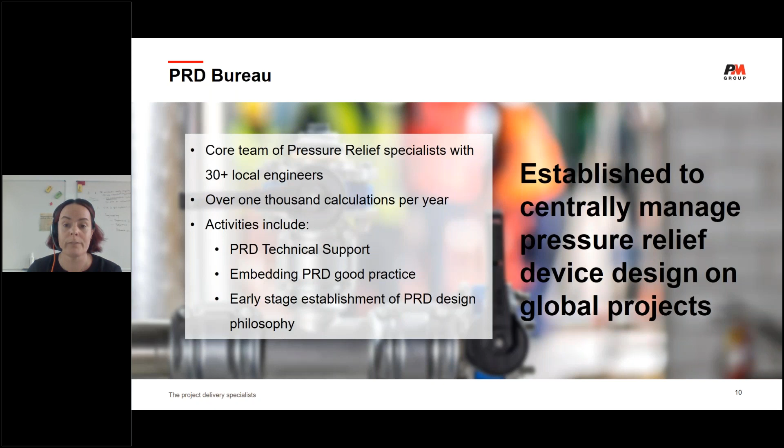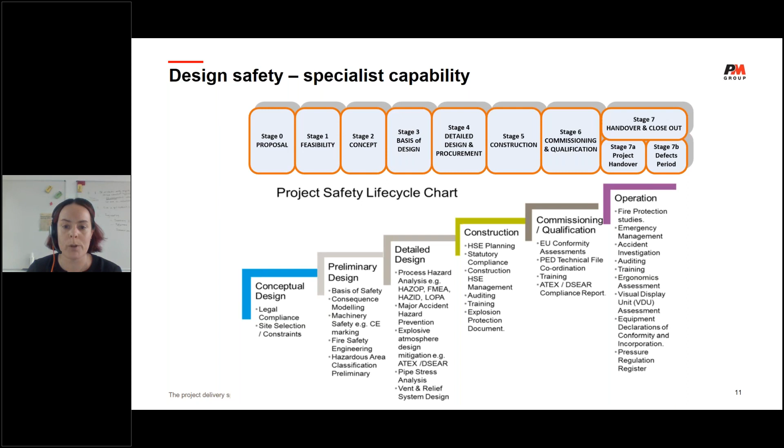Then just before I finish up, just a couple of process safety case studies, really just identifying what we're currently doing as a company. So some of the recent process safety services we would have offered to some of our clients, a big one at the moment, as I was saying, is risk assessment of aging assets, as well as risk assessments around new projects, and doing all the HAZ studies and the LOPAs that are required around that. Gap analysis versus best practice guidance. Again, that's quite a big thing that we would be doing for our clients.

And also the constant updating to your basis of safety and your COMAH as and when processes change or you introduce new processes, and the cycles that you need to do for those report updates in terms of your cyclical HAZOP studies that need to be done usually on a 5-yearly basis if you're an upper tier site.

And some of the clients that we've been doing that work for of late, you can see across the sectors that we work within, so a number of pharmaceutical clients, MSD, GSK, Pfizer, which I'm sure is a well-known name, and AstraZeneca there in current times, but we also do a lot of work with clients the likes of Johnson Matthey, a lot of fine chemicals and refinery work with them.

And that really concludes my presentation. Short, sweet, and hopefully gives you a feel for PM Group. Safety is very much the center of what we do as a company.

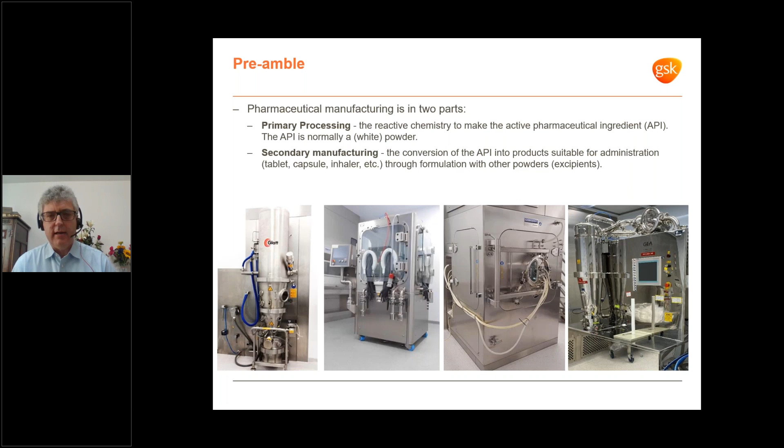And after that, for the last decade, my world has been secondary manufacture that takes that active ingredient, formulates it with other materials to produce the tablets or whatever it is we take as patients. A few operations are inerted, but most of the operations are done in air. And unless you realize the operations are done in air, the rest of this talk doesn't really make sense. And it's these unique challenges that we came to address.

And we set out to solve two real problems. The first is, what process safety information do we absolutely need to know, and what controls do we have to have in place in this early phase pilot plant world?

And to put early phase in context, there might be at most 10 kilograms of material in existence, and we really need that. It's just going to patients for the first time, so we're really short on material. And what happens if we don't know the information that we really need to know? That's the two parts of this.

Now, when I was first out of university and I wanted to know the property of something, I'd go to Perry. If Perry let me down, I'd potter down to the technical library, and nowadays things are much better. Information is just a few clicks away most of the time. But early phase medicine manufacture is different because it's very poor in data.

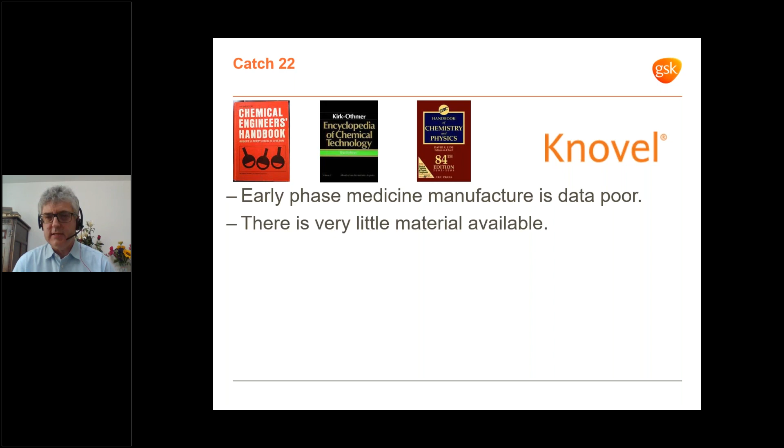It's very poor in data because we're dealing with materials that have never existed before, and there's not much of it available. I said 10 kilograms if we're lucky, which means we often don't have the kilo or so that we need to spare to get full fire and explosion data, because we really need that material for patients, and there's so little of it. And we compensate for this with really quite burdensome layers of protection in our pilot plants to allow for this lack of knowledge, and it makes operating very difficult.

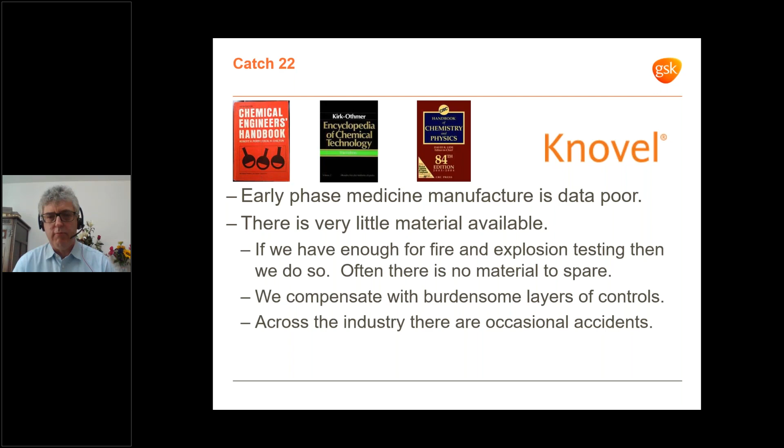And across the industry, there are accidents, and that prompted us onto this work. So there are really two arms to this work to try and make us safer. And the first arm is to really understand, what do we need to know? What can go wrong? What properties must we know to mitigate that? What controls do we have to have in place, and do we know they're working?

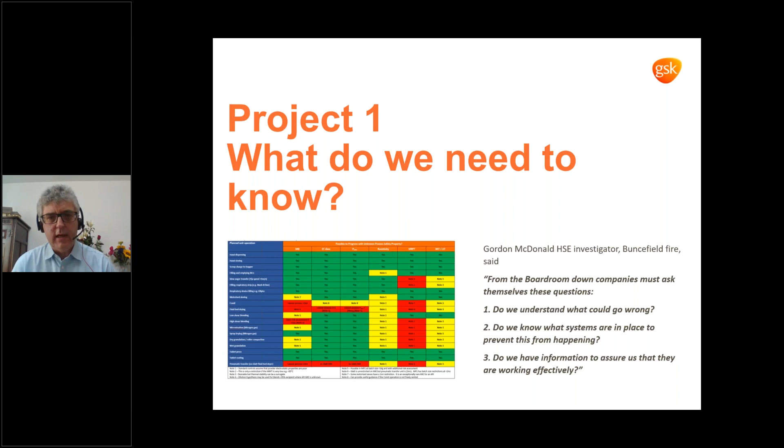So what the team have done is spend a long time laboriously going through unit operation by unit operation, understanding what information is critical and what controls are critical. And that's involved obviously talking with suppliers, literature reviews, a lot of calculations around charge generation potential, some calculation around kinetic energy and angular momentum, and all sorts of other things.

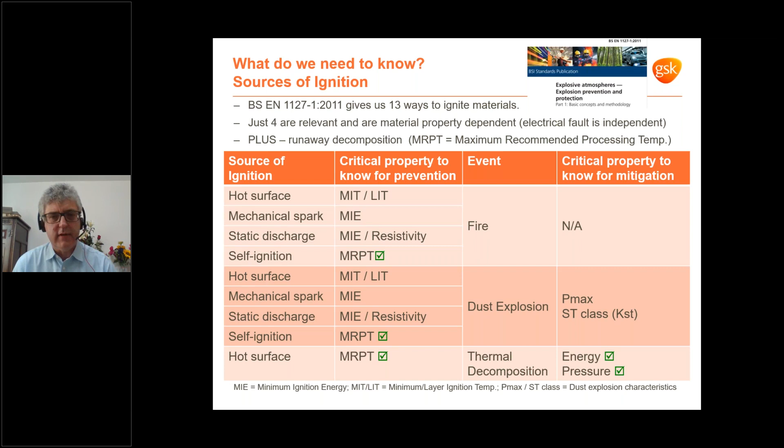So each unit operation ended up with several pages of detailed basis of safety, which at the top level, we have some operations come out very, very benign, and others are completely different. So the milling operation, there are a few things that we absolutely have to know, and there are lots of controls that are completely critical to that safe operation. And in going through this work, we found some controls where we have to actually go beyond the special conditions on the ATEX certificate. In fact, that isn't sufficient, and we need more restriction.

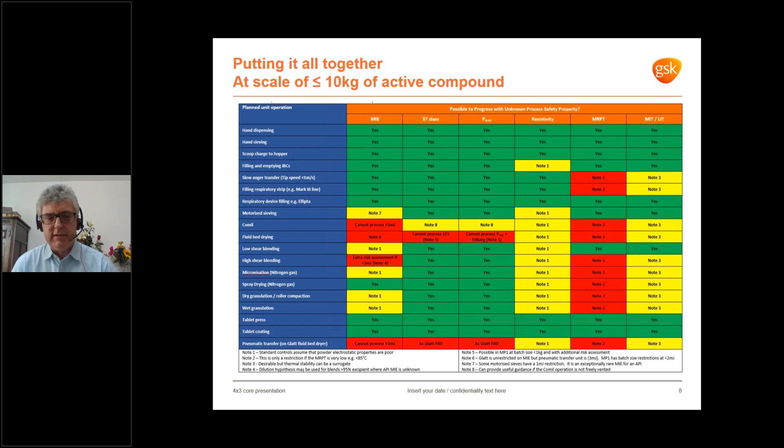All this comes together in a very handy chart that sits in our plant entry risk assessment process. And you can see the sea of green, that often we can cope without knowing information as long as our controls are working. And then you can see various areas in red where we absolutely have to know things, and we cannot operate unless we know it. And inevitably, there are grey areas, in this case masquerading as a yellow area, where things are more nuanced. And this is proving hugely beneficial to us in our plant entry process. It's made a real step change for us.

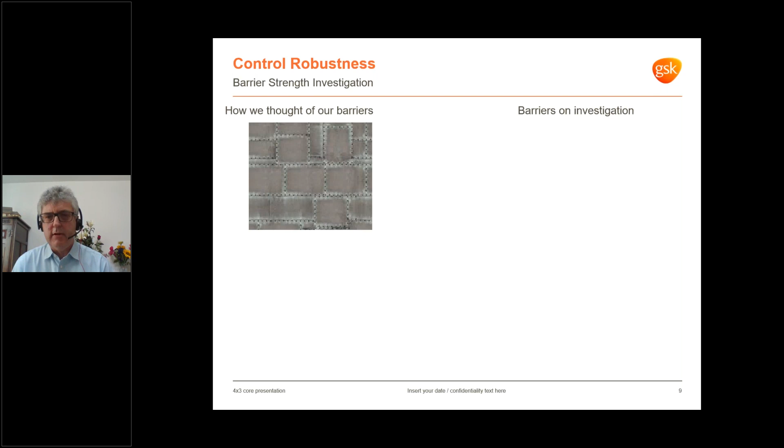But this only works if our controls work. So we had to look at our controls, and I thought our barriers were really good. Go out and investigate them, and that wasn't always the case. And I really want to thank the plant team for the work they've done, for the integrity, determination, and excellence they've shown in going out, identifying weak barriers, and fixing them.

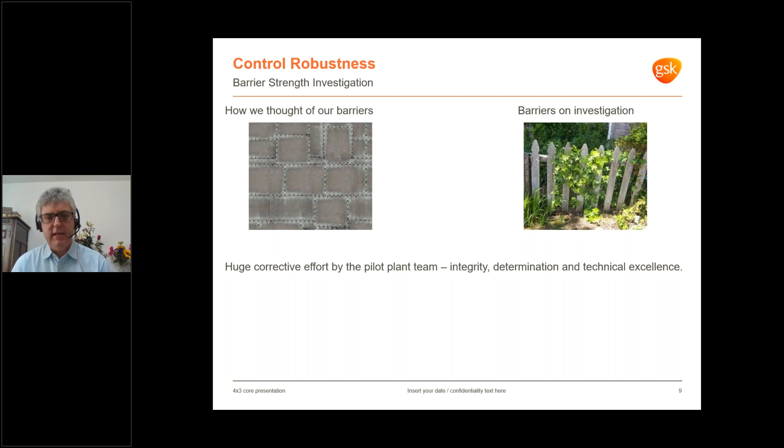There's lots of chunks of work that sit under this. I particularly want to call out our new FERA process, which is a step change improvement on everything that went before, and it's coming in very early at design. We're building in robust barriers from the start, and we're marrying process and operational safety together.

They aren't always comfortable bedfellows. Now, though it isn't on this slide, I'd also like to call out Sydney Lang's work on pre-start earthing checks and making that a really resilient system, because in the absence of inerting, earthing is a really key layer of protection for us.

So that was a brief overview of understanding what we need to know. Then the second problem is, what do we do if we don't know it? So what do we do if we have to know dust explosion properties, or we have to know minimum ignition energy, and we don't know them, and we can't spare the material to go out and find them? If we can spare the material, then we do.

And what I'm going to discuss briefly now is recently published, and please by all means go away and look it up. I think it's very technically interesting, but it's not about being technically interesting, it's about keeping people safe.

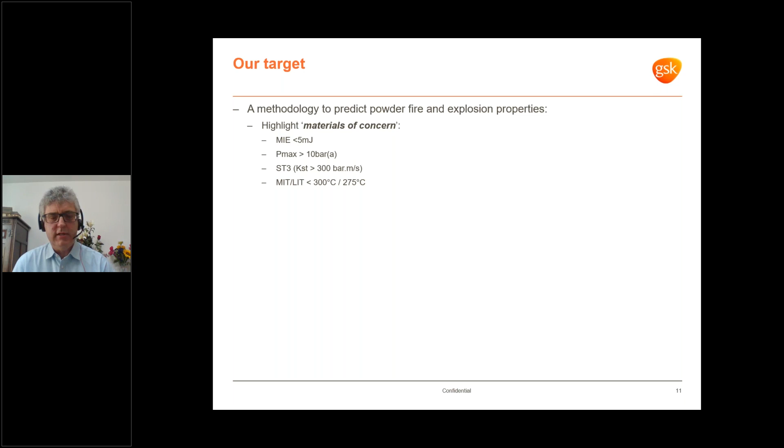So our target is to have a methodology to predict fire and explosion properties and identify materials of concern. And for us, a material of concern is one which is unusually susceptible to ignition, has dust explosion properties beyond those that we can normally mitigate in our equipment, is unusually susceptible to ignition at a low temperature, and many people on this call will instantly recognize that as T3.

And our success criteria, well, we should use less than a gram of material. Even though we're a large pharmaceutical company, we couldn't spend any money. And we'd accept a level of false positives. What we really wouldn't want is any false negatives.

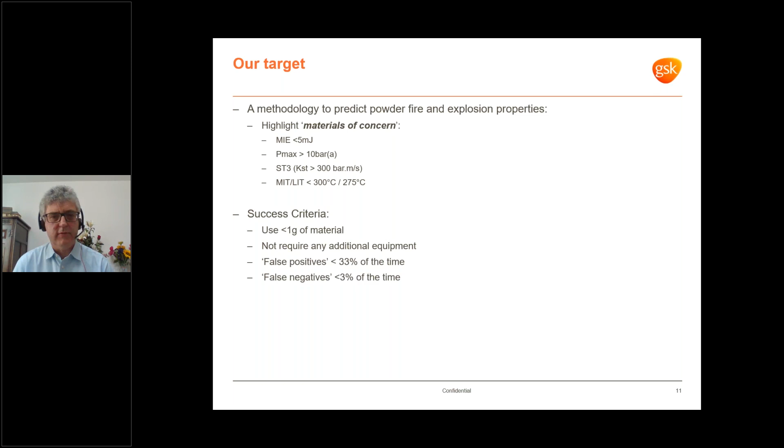So moving on to minimum ignition energy, there's an existing literature equation to give minimum ignition energy, and for a range of typical densities and specific heats of products, we can solve this equation. Since the equation was developed, there's been greater understanding of spark generation efficiency. There's a correction that needs to be added for that, but it comes out at about 9 to 26 millijoules.

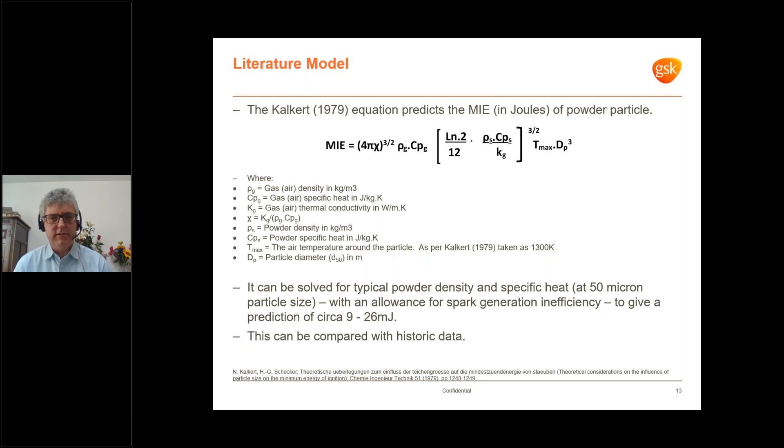And for our established products over time, we've burnt a lot of material to understand their fire and explosion properties. So we've got a big database and a fantastic custodian of that database. So we can compare that prediction with historic data. And what we see is the equation is in the right ballpark, but it isn't giving a broad enough range.

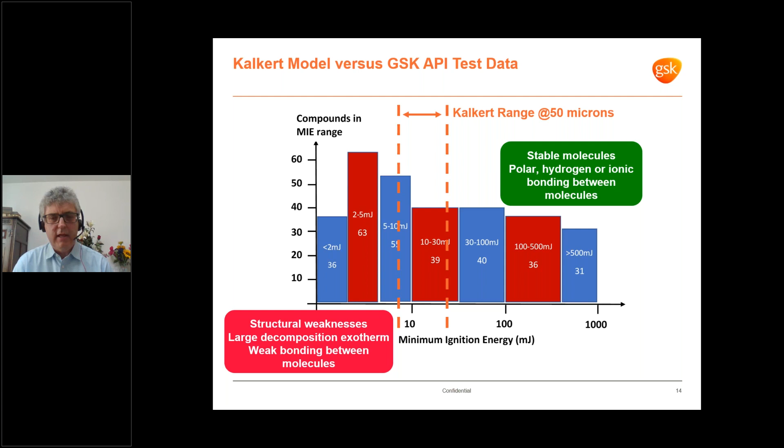And to run the model, you need good chemists. Fortunately, we have some excellent chemists, because we need people that can understand how molecules will cleave and what they'll cleave. And we need to back that up with 2 experiments. But those 2 experiments only use 50 milligrams of material. For the future, we think there's another factor around shape, flow, dispersion, but that factor is probably more important for the dust explosion model we're coming on to.

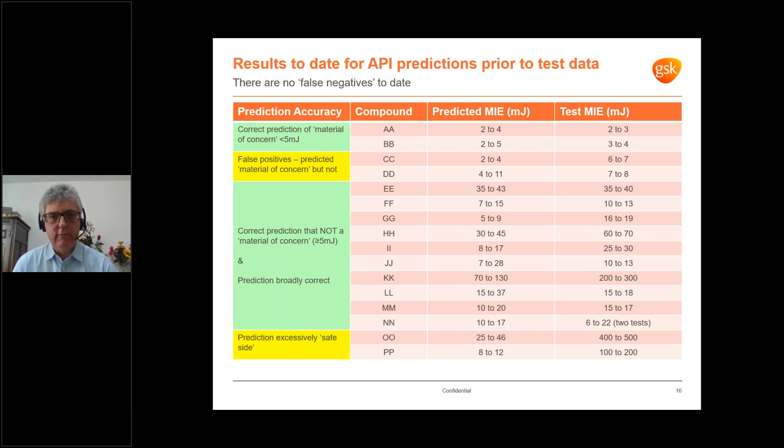But MIE is going really, really well. Dust explosions follow the same hypothesis, that the dust explosion properties are dominated by the most readily flammable portion of the molecule. So sometimes that is the whole molecule goes up, but more often we believe that's a flammable fragment that's cleaving from the parent, and it's that fragment, sometimes a couple of fragments, that dominate the dust explosion properties.

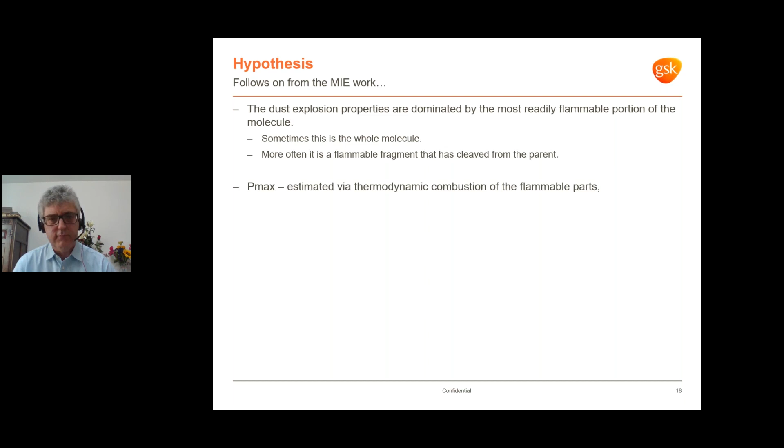We do Pmax by thermodynamic combustion of the flammable parts, and essentially that's undergraduate thermodynamics, which is just as well because it's the only thermodynamics I'm still able to do. And it's based on the cleaved flammable fragments of the molecule. We do the whole molecule as a safeguard, and heat of combustion comes from a bit of simulation software called CHETAH that John also mentions in his talk that's up next, or published data if it's cleaving a really common molecule. KST, I'll come on to the next slide.

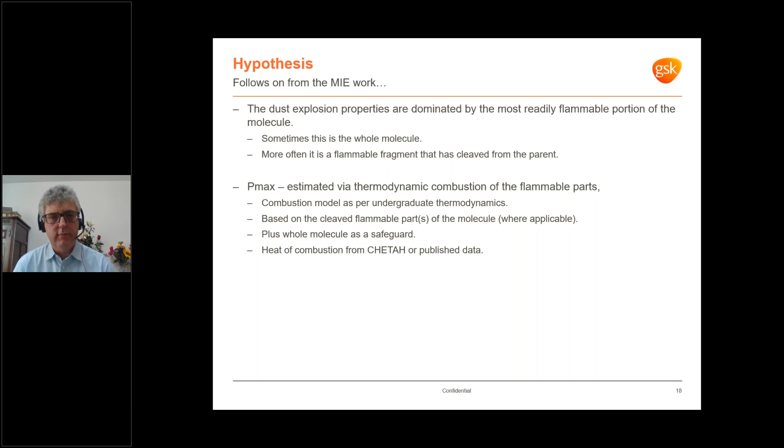And we think we have these excessive safe side results because the model assumes perfect dispersion of the powder, and we've got some evidence that these powders don't actually disperse perfectly. Whether we can build this into the model or not, we don't know. We're still working on that.

The minimum and layer ignition temperature follows really the same methodology. It ends up as a flow chart. So we're interested in how the molecule cleaves. Does it cleave something which has a very low auto ignition temperature? Is there anything in the structure that suggests it could act as an accelerant? Does it have a very large heat of thermal decomposition that can help take the molecule up to an ignition temperature? If not, we go down a very clean side of the chart. We end up at T3, we might end up at T4, or we might end up at we really have to do the experiment and there's no way out of doing the experiment.

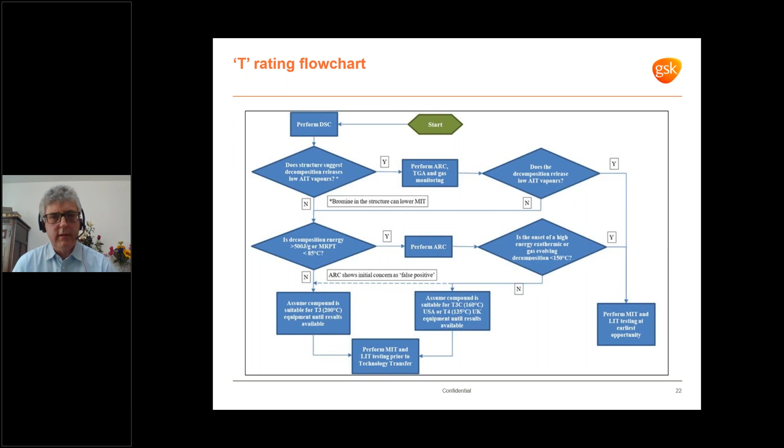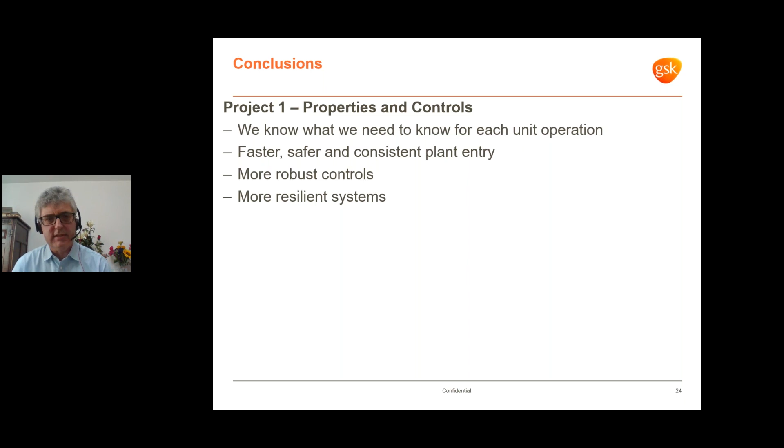In conclusion, the first project, how do we know what we need to know? That's gone really well. So we do know what we need to know for each unit operation. It's giving us much quicker and safer and consistent plant entry. We've got better controls and more resilient systems. For property prediction, we should always test if we have the materials to allow us to test. Prediction is not as good as testing. We should always test, but we are picking up the materials of concern with the caveat that it's a relatively small sample size. We're meeting our success criteria.

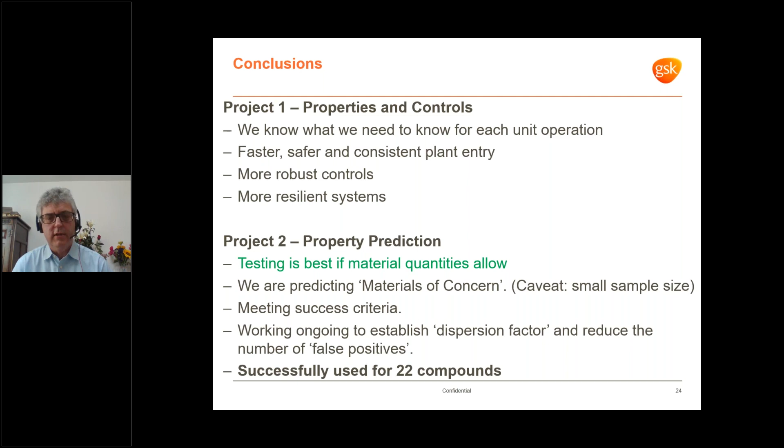We can work on the dispersion factor. Whether we achieve that or not, I don't know. We shall see. But it's in use. It said here we use it for 22 compounds. I think we're now up to 24 compounds, but it's in use and really providing value for us.

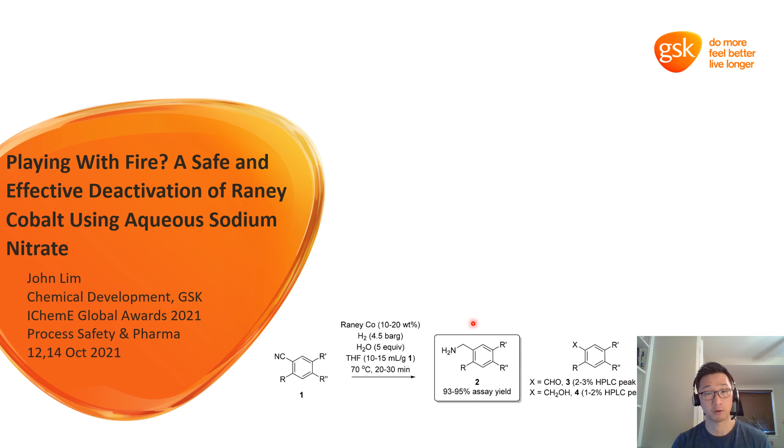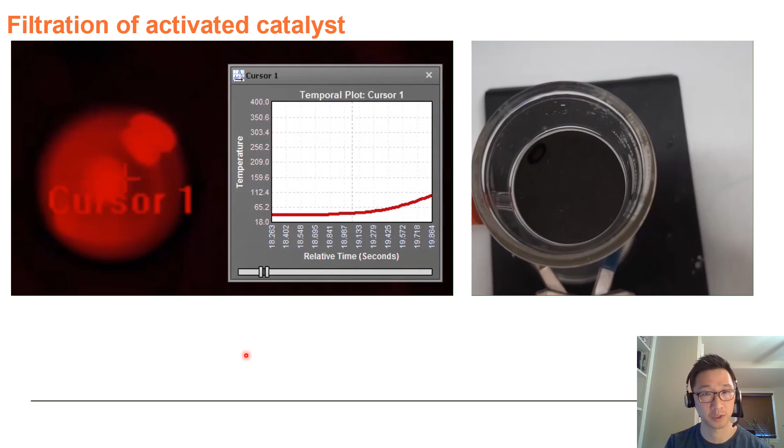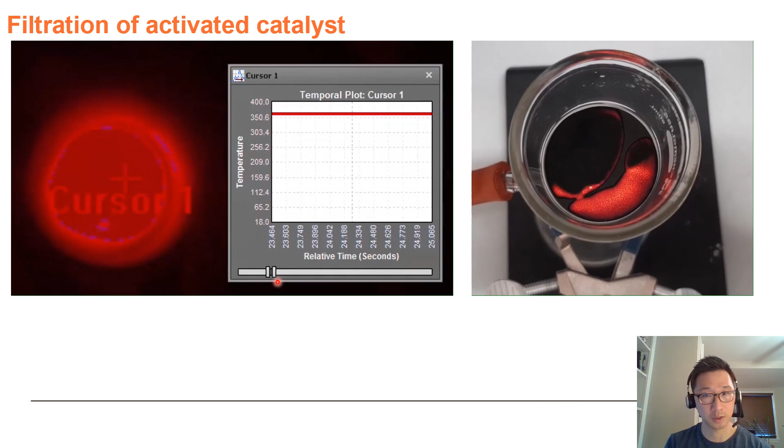So this is what happens when Raney cobalt gets dry. What I'm doing here is something you should never do: filtering the catalyst to dryness. The image on the left is taken with a thermal imaging camera, the image on the right with a standard video camera. As you can see, upon reaching dryness, the catalyst bed reaches temperatures in excess of 350 degrees, which is the detection limit of the camera, so the actual temperature is probably much greater than that.

So the pros of using Raney cobalt is that it gives us a very clean reaction profile using an earth-abundant metal. The cons is that because we're loading 10 to 20 weight percent catalyst, that's a lot of catalyst that we have to handle and dispose of later.

Now we had a pilot plant campaign planned at our Cork pilot plant where we anticipated making about 100 kilograms of API. If we're charging 10 to 20 weight percent catalyst, that's 20 kilograms of catalyst or so. You don't want that much catalyst reaching temperatures in excess of 350 degrees in just a few seconds. Thus the Cork pilot plant requested that we come up with a way to effectively deactivate the Raney cobalt so that it was safe to handle even when dry.

So in other words, we couldn't just drum up the stuff underwater, we actually had to deactivate it.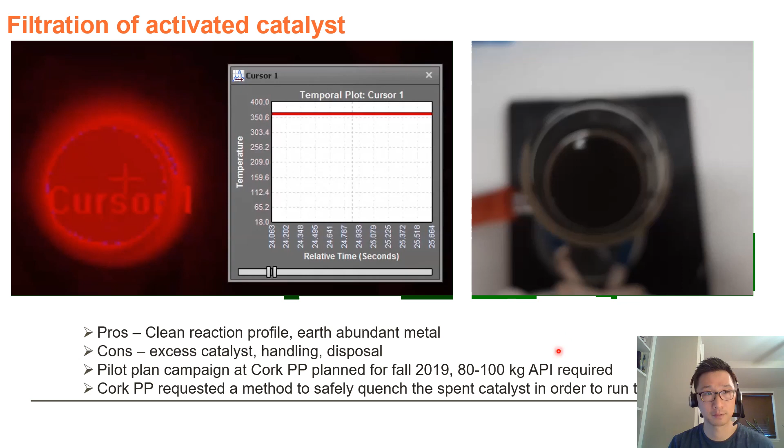Now, a common way to deactivate Raney metals is using bleach. So what I'm doing here in this video is I have a little bit of Raney cobalt in the graduated cylinder, and I'm adding typical household bleach solution. As the video comes into focus, you'll notice some vigorous bubbling happening. This is concerning; you don't want this happening in your reactor. It's not too dangerous here in the fume hood, but you don't want all this off-gassing to happen when you're trying to quench the catalyst in a reactor.

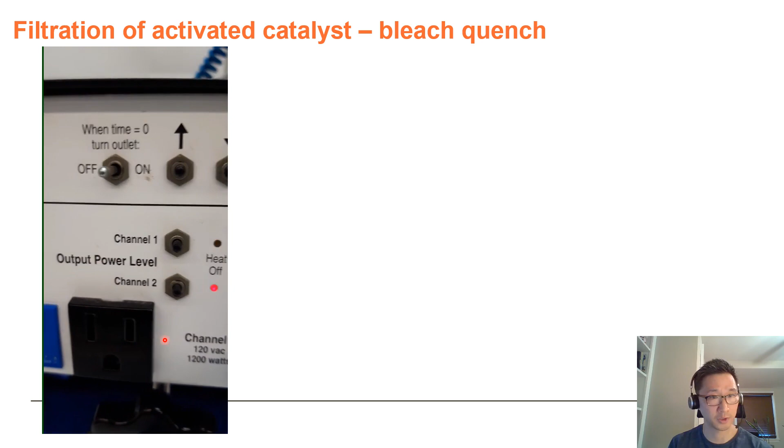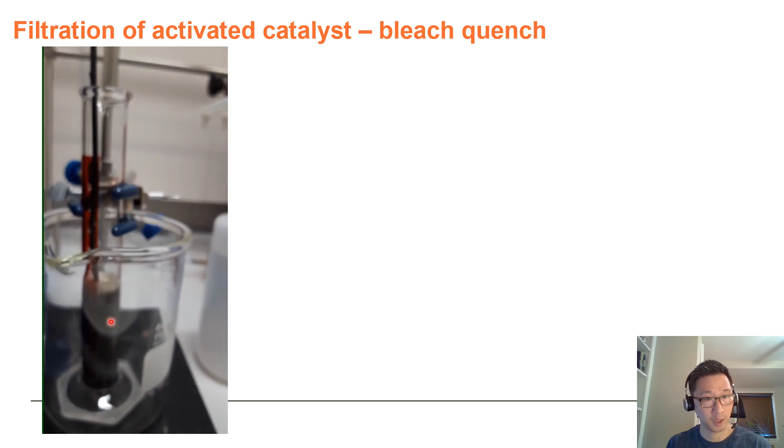What's also very concerning is that the temperature of the slurry was about 20 degrees at the start before the addition of the bleach. Upon adding the bleach, you notice a very rapid exotherm in excess of 20 degrees. Keep in mind, this is not really a controlled reactor—it's open to air, so there's probably some heat loss to the environment, and that 20-degree exotherm is probably not indicative of the actual heat generated. There's probably more heat than that.

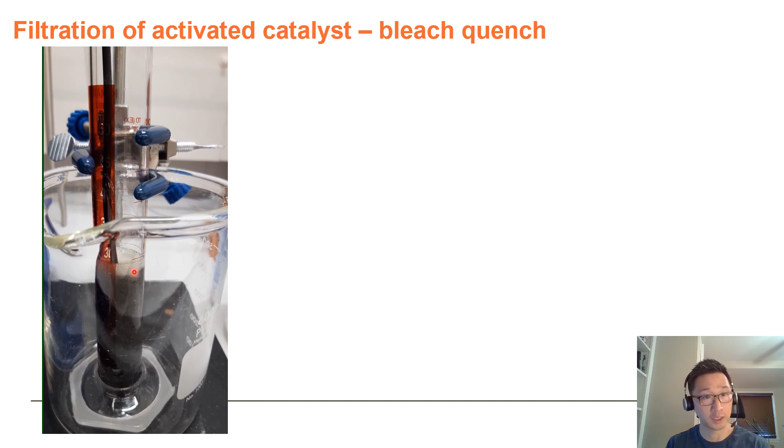Qualitatively, we can see that the bleach quench is not safe. It's exothermic, and we see a lot of gas evolution upon quenching. Now, I should say, though, that the bleach quench does work—the catalyst, after it's been treated with bleach, is deactivated. However, there are some hazards that are clearly evident just upon qualitative observation, but we wanted a more quantitative evaluation of the hazards of using bleach to quench Raney cobalt.

So in order to quantitatively assess the hazards of using bleach to quench Raney cobalt, what we did is we took 35 grams of Raney cobalt from our supplier. We put it into a Parr vessel and hydrogenated it with about 4 or 5 bar of hydrogen to mimic reaction conditions. We then took that activated catalyst and measured the heat and off-gassing when quenching with 20 volumes of 5% bleach in what's called our RC1, or reaction calorimeter.

The green trace represents the addition of the bleach. The red trace represents the heat output. The blue trace represents the off-gassing. What you notice is that once we start adding the bleach, there's an immediate exotherm. In fact, there's so much heat we actually have to wait for the reaction to cool down before we add the rest. Once we resume the bleach addition, we notice another exotherm and very significant off-gassing here, and the gas we later identified as oxygen.

At the end of the reaction, we did the calculations and found that the total heat output was about 3,800 kilojoules per kilogram of catalyst, which equated to a 53-degree adiabatic temperature rise. Now, a typical plant reactor can handle about a 20-degree adiabatic temperature rise, so this is well in excess of that. What was also very concerning is the gas evolution, 91 liters per kilogram of catalyst. So once again, if you're charging 20 kilograms of catalyst, you do not want to be producing about 1,800 liters of oxygen when you're trying to do the quench.

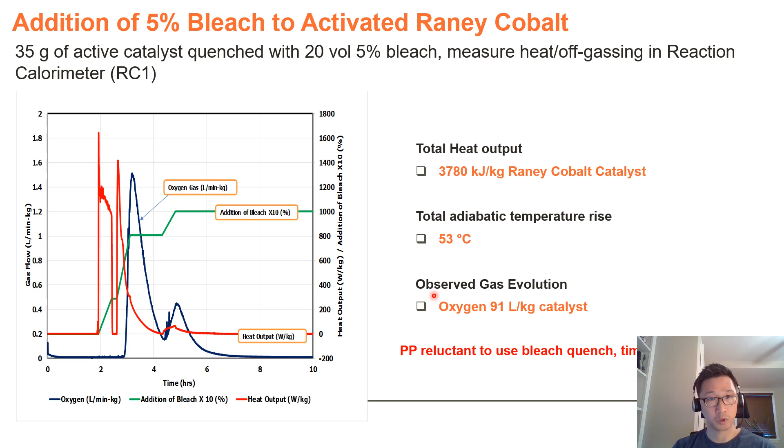Now, the pilot plant staff, upon seeing this data, were understandably alarmed, and thus they would not run the Raney cobalt process as we designed it using the bleach quench. At this point in the project, there were a lot of meetings happening, a lot of brainstorming, a lot of ideas that didn't actually work. And so this put the project timelines in jeopardy.

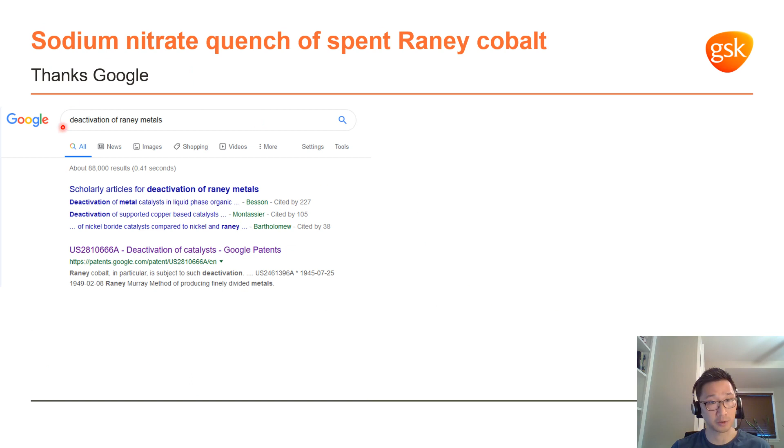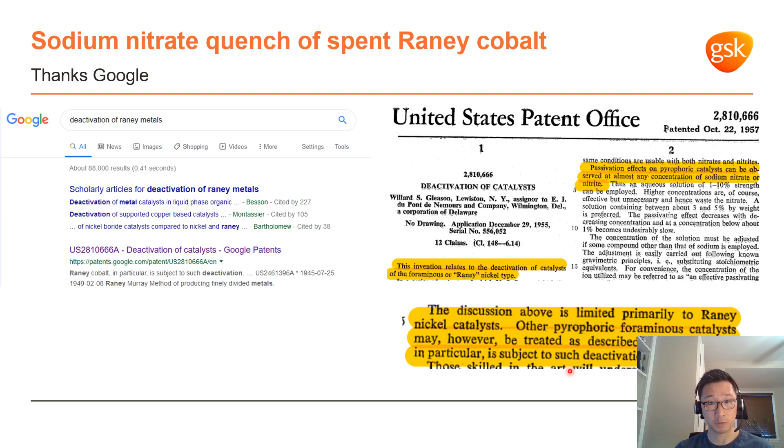So at this point, I did what a lot of people do during times of stress: I went to Google. Here is a screenshot of the Google search I did that day, 'deactivation of Raney metals,' which brought back this patent from 1957 from the DuPont company. The authors describe deactivation of Raney nickel using aqueous sodium nitrate or nitrite, saying the aqueous sodium nitrate was a little bit more effective. It's one of the shortest patents I've ever read, and I'm glad I read to the end, because at the end the authors mention that Raney cobalt could also be deactivated in the same manner. So we decided to try it out for ourselves.

So we did the same reaction as before. We took 35 grams of Raney cobalt. We activated it under 4 or 5 bar of hydrogen, but this time we quenched with 20 volumes of 5% sodium nitrate in an RC1, where we measured the heat and off-gassing.

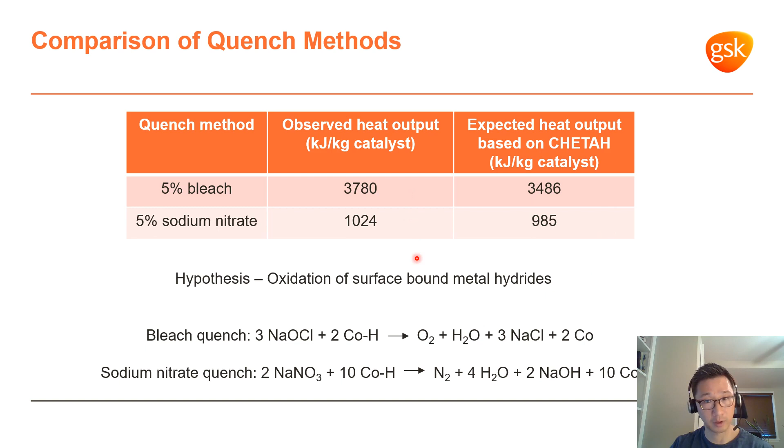This is a hypothesis of ours, so in order to test it, our process safety engineers perform what's called a CHETAH calculation. CHETAH is just a standard process safety calculation where they estimate the heat output based on published data. When we do the calculation based on these proposed balanced chemical equations, the expected heat output for each quench is very close to the observed value.

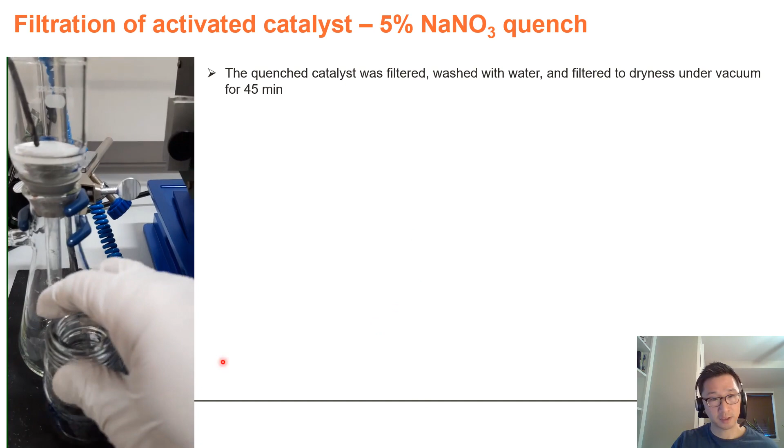The numbers are all well and good, but does the sodium nitrate quench actually work? Does it actually deactivate the catalyst? So what I've done here is I've taken some activated Raney cobalt, slurried it up in some sodium nitrate solution, and I'm going to filter to dryness again.

Now, a lot of presenters will save the exciting video for the end, the one with the big explosion. I'm going to do the exact opposite and show you the most boring video here at the end of the presentation. As I filter to dryness, absolutely nothing happens.

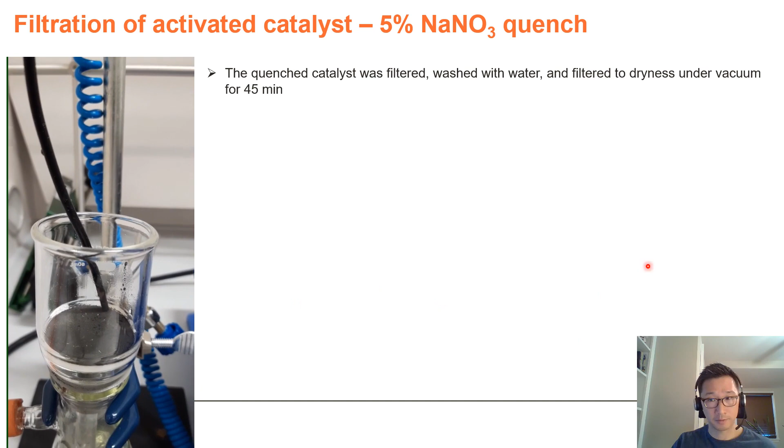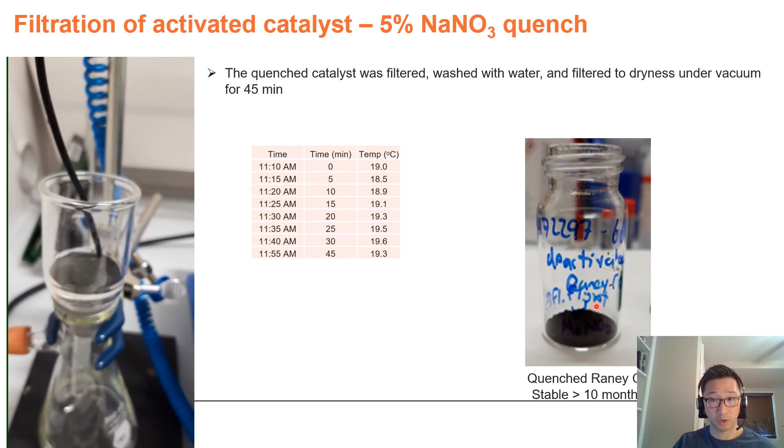So I measured the temperature of the catalyst bed for 45 minutes. I won't make you sit through all 45 minutes, but in all that time, the temperature of the catalyst bed never gets above 20 degrees. The catalyst has been completely deactivated, stable to open air even when dry. This material is sitting in my fume hood as we speak, completely happy. No self-igniting behavior is ever observed.

And thus, upon seeing the data, the Raney cobalt process was approved for our pilot plant campaign. If you care to read about this further, we published an OPRD not too long ago.

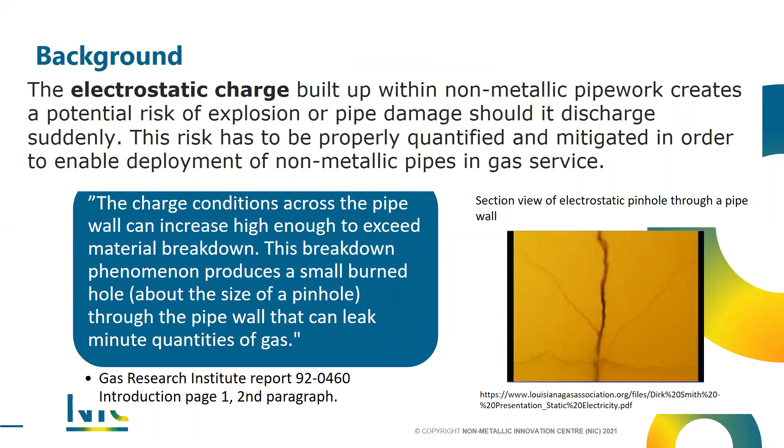So the risk of electrostatic discharge should therefore be properly quantified and mitigated to ensure safe operation of non-metallic pipes in gas service, and this is a challenge that we've addressed in this work. Our aims were to develop a model of a non-metallic system, and this would be a multi-physics modelling approach to assess the risk of electrostatic discharge. The problem is highly nonlinear and multi-physical, and we would validate the model against experiment. So that was a challenge.

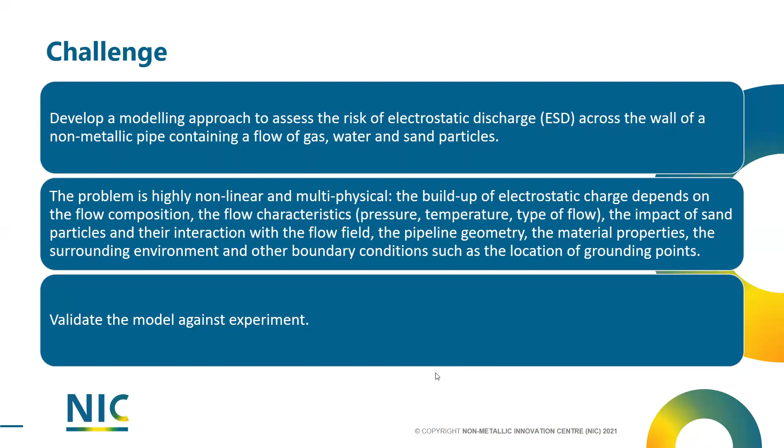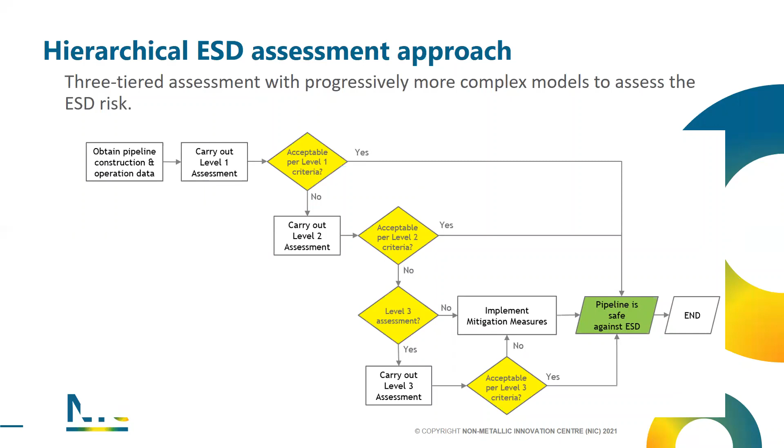So can we predict the risk of electrostatic discharge in non-metallic pipes? We created a hierarchical assessment method, whereby increasingly more detailed and complex models, as you progressed down the levels, gave more accurate results. So going into detail on the different levels.

So our level 1 approach, which was the baseline approach that we adopted, was the most conservative method and relied on determination of the flow regime using Baker or Mandhane charts, which use the gas and liquid velocity as inputs. If a mist flow was present, then it was determined that there would be a high risk of static charge buildup and potential discharge. And so the operating conditions would be altered to avoid this mist flow regime.

This approach has several limitations, however, in that it is reliant wholly on the flow regime, it's overly conservative, and the proposed mitigation measures can be difficult to implement. In addition, it doesn't quantify the risk of ESD.

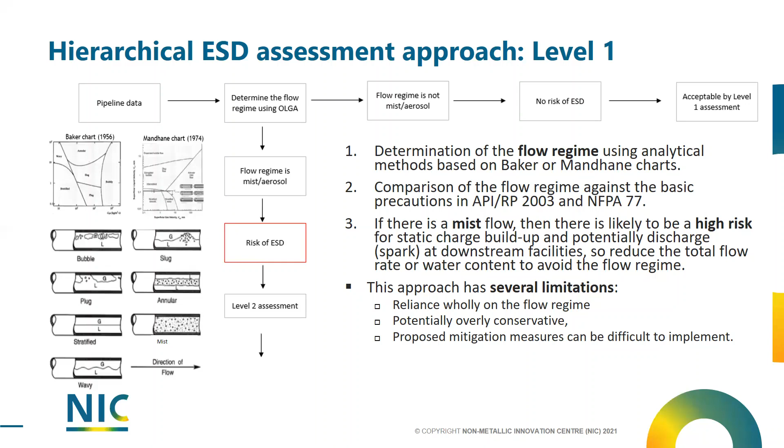So limitations of the level 2 approach are that there are conservative assumptions incorporated in the Walmsley equation, such as the assumption of a constant electric field through the thickness of the pipe.

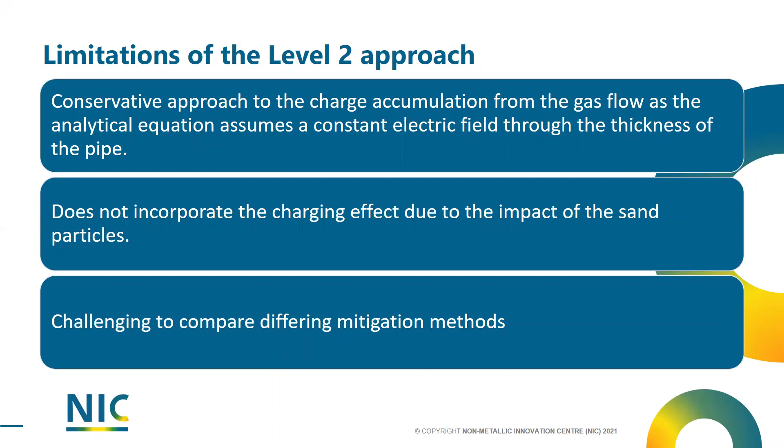In addition, the level 2 approach does not incorporate the charging effect due to the impact of any sand particles present, and it's challenging to compare different mitigation methods. So our level 3 approach

was the full numerical modelling approach accounting for the multi-physical behaviour in COMSOL. The velocity of the gas flowing through the pipe was found using the pipe flow module, and this was then used to calculate the streaming current expected along the pipe. An axisymmetric model in the AC/DC module was then used to calculate the potential on the inner surface of the pipe and the electric field across the pipe wall.

The streaming current was applied as a boundary condition on the inner surface of the pipe, assuming exponential charge generation and charge relaxation, and grounding on the outer pipe surface and the pipe ends due to the buried nature of the pipes that we were modelling. The top image shows a close-up of the results of the plot of the potential from the AC/DC module. It's a close-up at the end of the pipe, and you can just about distinguish between the fluid and the pipe wall at the bottom of the top image.

We then compared the results of the AC/DC module to the analytical Walmsley equation. We found that applying the streaming current using the external current density boundary condition, a specific boundary condition in the AC/DC module, whereby the electric field across the pipe wall was constant, provided results which coincided with the Walmsley equation, shown by the light blue and yellow lines in the graph.

Applying the streaming current using the boundary current condition, which is more representative of the physical situation, allowed for a radially varying electric field that reduced the conservatism further and provided a more accurate value of the potential on the inner surface of the pipe.

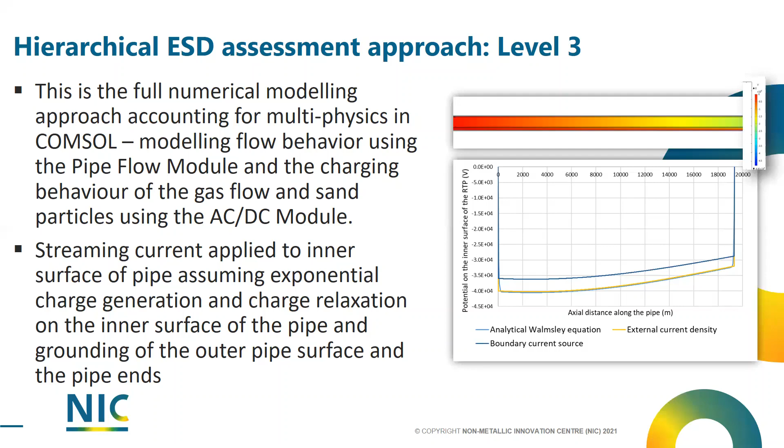We then built upon the level 3 model to add in the behaviour of sand. We did this using the capacitor model, which was used to model the charge transferred during the impact by treating the sand and pipe as either side of a capacitor. There are several tuning parameters in this model, so we used literature to tune that model.

We then considered how to incorporate the charge transferred by the sand particles into the model, and we did this by effectively smearing out the localized charging due to the impacts over the impact area, whether that is the entire inner surface of the pipe for a fully suspended flow or just the bottom region of the pipe for a moving bed. This was then incorporated into the model using an additional current density.

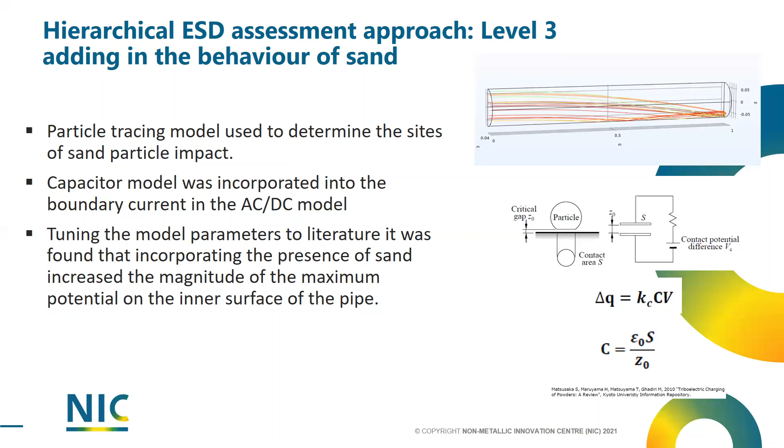So, conclusions. Assessing and controlling the risk of electrostatic discharge facilitates the widespread use of non-metallic pipes in the oil and gas industry. A hierarchical modelling approach has been developed to assess at the design stage the potential risk of electrostatic discharge in non-metallic pipes. The level 3 approach has the flexibility to assess the efficacy of potential mitigation methods, and our experimental validation showed the models to be conservative, although more work needs to be done to investigate the level of conservatism between the experiment and the model.

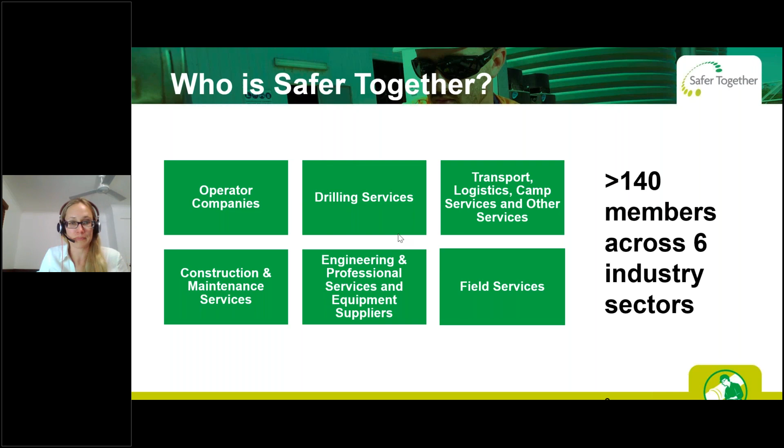So what was the goal with this project? Essentially, it was to bridge an awareness gap. Some companies in our industry have significant experience in process safety, and unfortunately, others do not. So there are many touch points in our industry activities that can contribute towards preventing loss of containment incidents and the significant harm that can go with these.

So really the project's objective was to enable our member companies to start or enhance an existing process safety conversation about the roles we all play in keeping hazardous materials contained. This initiative of Safer Together aimed to improve our member companies' awareness of the influence we all have on process safety.

How did we tackle this? To develop this work, process safety professionals from across multiple companies in various sectors within the gas industry in Queensland collaborated to ensure broad suitability of content to support the process safety understanding we wish to grow.

We wanted to touch on the asset lifecycle, from design through to operation, the supporting supply chains within our industry sectors, and the process from well through pipeline, compressor station, and onto an LNG facility. We did not intend to cover all process safety risks that we face daily, nor to provide an exhaustive list of barriers that we ensure are in place. We did want to introduce process safety concepts within the narrative that can be expanded upon in later conversation. So it's really the basis of having further conversation with teams.

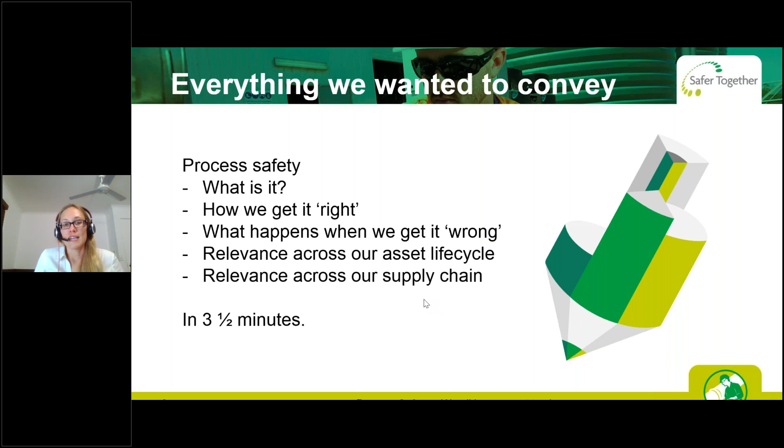So there's something different we saw. We are all aware how difficult it is to retain people's attention, especially in process safety. So this was really something front of mind. How do we provide a resource that will capture and retain attention long enough for a message to be heard? That was a key challenge. So we had to create something that was visually and audibly interesting, inspiring a call to action, and unusual, unexpected, with an Australian flavour. And that was the end result, trying to captivate people to watch the animation.

And what was a must? It was imperative to the project team that scenes created appropriately capture environmentally appropriate and sustainable views within the Australian context. Importantly, it has included an acknowledgement of country at the film start, acknowledging the traditional owners of the lands upon which this industry operates in Australia. Diversity of people has been represented through depiction of multiple ethnic backgrounds and genders in the sketches.

Environmental sustainability has been affirmed through an inclusion of Australian wildlife in several scenes, with flying cockatoos and kangaroos in the landscape. Where red and green colours have been used to convey meaning, colourblind people have been catered for with the inclusion of cross-hatching in the red colour used to make it more distinctive. And subtitles have been incorporated to support those with hearing impairment or use of the film in noisy environments.

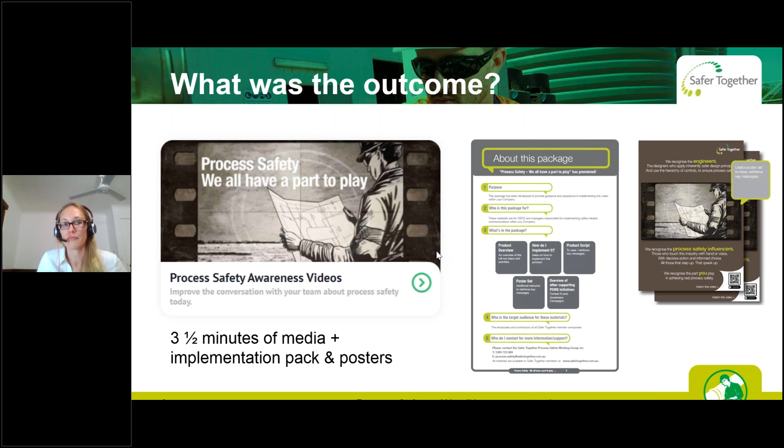How is it being used? The video was implemented via the Safer Together website hub, which acts as a central industry safety and collaboration hub for our members. It demonstrates positive collaboration by multiple subject matter experts across companies for the benefit of the industry as a whole. It is now used to introduce process safety in the common industry induction for the oil and gas industry in Australia. It is referenced by IOGP as a resource for process safety fundamentals and has been used as part of training and campaigns by our member companies. It is relevant globally and has been made freely available.

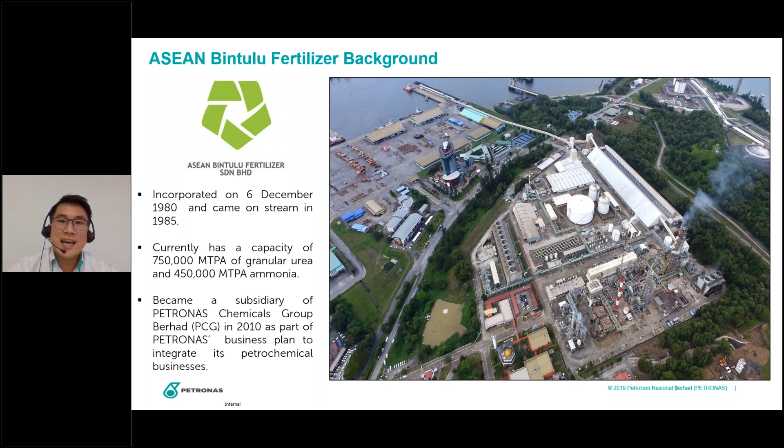As a petrochemical plant, we have high pressure and temperature vessels and equipment required to produce our intended product. And to operate a plant with such high temperature and pressure, there are definitely safety features introduced into our plant's vessels and equipment. And those are the things that we classify as safety critical elements.

So safety critical elements refer to the hardware barriers to prevent or mitigate major accident hazards. And these major accident hazards come from our hazards and effects management process. Basically, before the top event happens, we would like to prevent it. And if it does happen, we would like to mitigate it so that it doesn't escalate to a worse consequence.

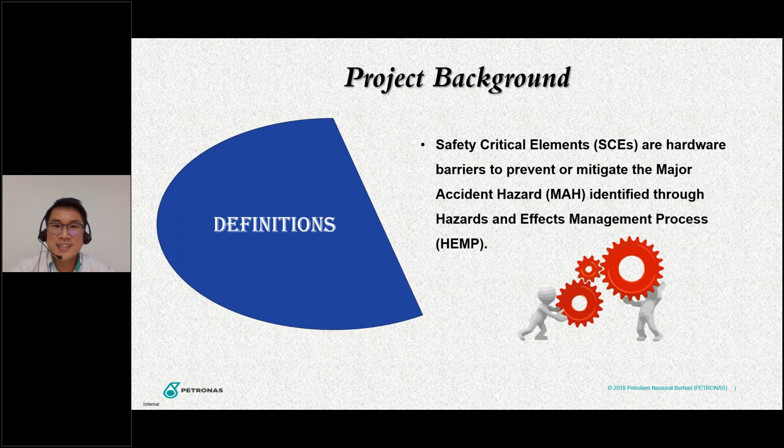So now we know these safety critical elements are crucial to safeguard our plant operation and prevent unwanted process safety incidents, but how do our people perceive them? We started by going down to the ground and checking in with our maintenance team. In 2020, we talked to our maintenance staff, and from the survey we found out that it takes about 15 minutes to find the right safety critical element tags to perform preventive maintenance or troubleshooting.

This is partially due to the fact that our plant, throughout the past 30 years, has been subjected to rejuvenation and revamps. And this causes the space between the equipment to be much smaller than intended when the plant was first built.

And in 2020, there were about 12,000 work orders called into the system, resulting in more than 1,400 hours spent searching for SCE tags alone. And every time they try to bypass or troubleshoot this SCE, a risk assessment is triggered to analyze the risks associated with bypassing these SCEs.

Based on this risk assessment, it was identified that bypassing the wrong tags is a prominent risk, and it keeps popping up at every single risk assessment. From the risk assessment, we saw that it creates a potential loss of $320,000 for any unplanned shutdown, and also 1.06 million USD for asset damage if the bypass somehow went wrong.

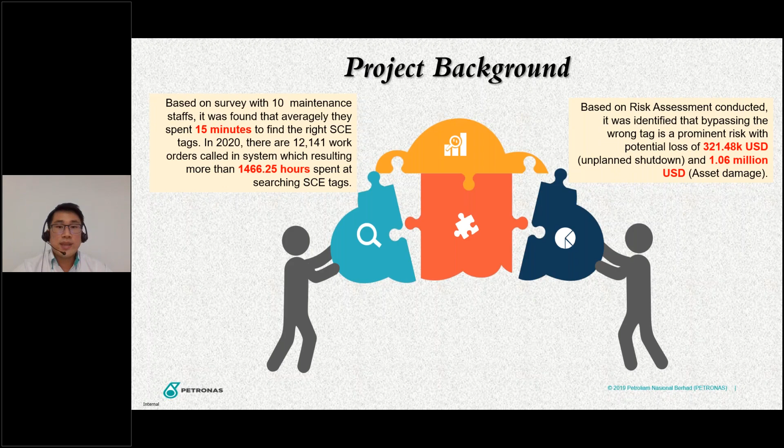So now that we know there are difficulties faced by our staff in managing our safety critical elements, we turn back to our team to figure out what opportunities we have for improving these safety critical elements. That's where we go into this improvement opportunity analysis.

We basically went back to the very basic Ishikawa diagram, or the fishbone diagram, and went through these 5 elements: the system, methods, people, machine, and also tools. Eventually we found out there are 2 very prominent causes.

Number 1, people are unable to differentiate the SCE at site. As I mentioned, our plant is a 30+ year old plant, and since the very beginning there's no differentiation between safety critical elements and non-safety critical elements. So our technicians and operators don't know when they go to the plant, it just looks like the same thing to them.

So they don't have a differentiation of what is a safety critical element. Secondly, the tag numbers are not clear and we're unable to find the correct tags at site. What I mean is, we've gone through revamps and rejuvenations of the plant, and different contractors have different tagging methodology—some tags have aluminum with engraving, some have a metal plate with engraving, and worse, some metal plates are marked with permanent marker. Imagine how permanent that is. Eventually, after a few years, it starts to fade and you lose the identity information of our instrumentation or equipment.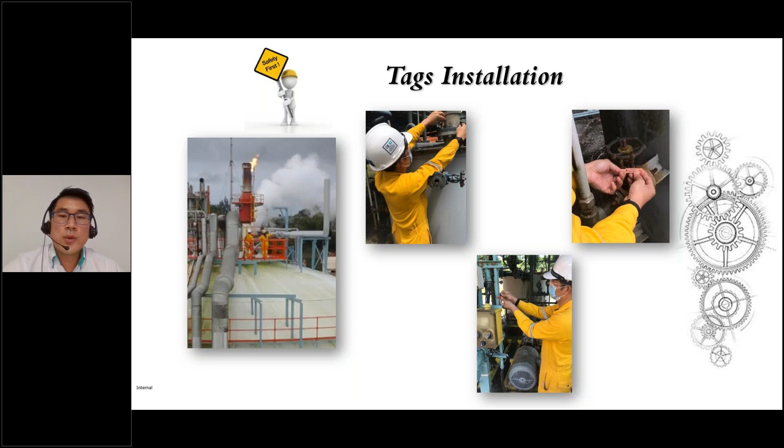Of course, once we've done the tagging, it's not for us, it's actually back to the staff in our plant, basically the maintenance staff and the operators. So in our case, we went out to survey again with our maintenance technicians.

Just to remind again, previously we spent about 15 minutes searching for the tags before they performed the actual work. After implementation of our tags, we found out that the average time taken to search for the right tag reduced to 7 minutes, averaged from the participants we surveyed. This is a whopping 53% reduction in terms of searching time.

If we compare to 2020, out of all the 12,000 or so call-outs, they could save about 780 hours in terms of searching time. That's a lot of hours that can be put into other kinds of work, to troubleshoot and maintain other equipment rather than spending time searching for it.

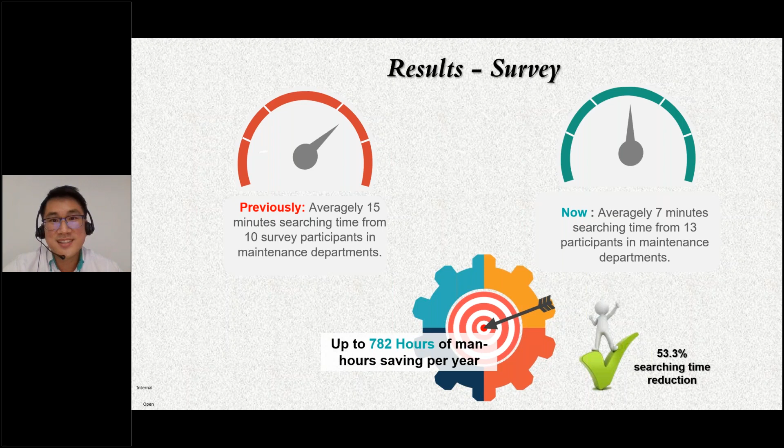So when we talk about this project, we also link it to the sustainability agenda. I believe the sustainability agenda is also a very widely known agenda in any industry in the world. We are now striving to be a more sustainable industry so that we can help planet Earth. So in terms of our project, we also adopted two concepts of our sustainability agenda.

First is recycle. Our tags, as I mentioned, are actually made of stainless steel with UV printing. That means whenever we have a new tag coming in after our risk assessment, or one has already been decommissioned, we can use the tag again, reprint it, and reuse it at site, so this tag will not just be a tag for one use only.

On the second term, we actually adopted reuse as well. We found out that there's quite a lot of stainless steel wire that's just thrown away at the site by our maintenance technicians. So we went and asked their permission to use the wires, and by reusing these wires, we executed this tagging exercise in our plant so that we can achieve our intended project outcome as well.

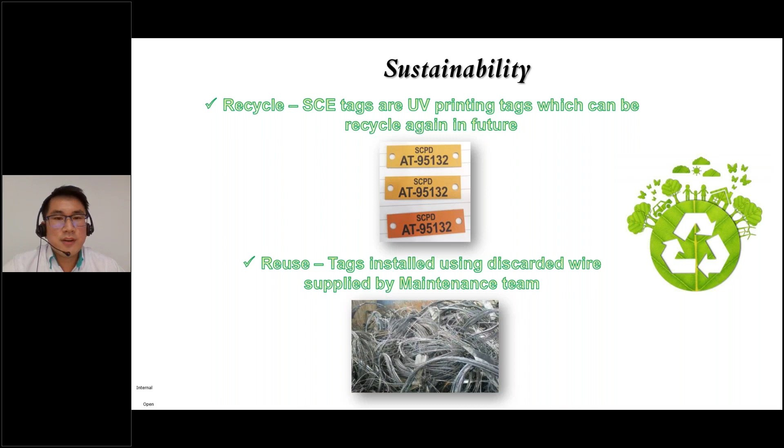Our project, if you look at it, is a very simple yet very powerful project, I can say, and it is scalable by any industry in the world. This is a very simple way of us giving back to our plant personnel and giving them a notion that these are the safety critical elements in our plant.

In any industry, I don't think there's any industry without any safety feature, and that is why this project is so easy to be scaled by any industry, and you can use any tags you want. It may not be applicable for you due to weather conditions or whatnot, but this tagging exercise has already been proven in our plant to successfully highlight the importance of these safety critical elements, shorten their searching time, and also prevent bypassing the wrong tags.

So by labeling it and giving it back the right attention, the right identity, all staff now are able to perform their tasks related to our SCEs at lower risk and in less time. That's all from me, thank you.

Thank you, Lee, that was really impressive. Thank you very much. I'd like to ask everyone if you have any questions for Lee. I can't see any questions right now. No, and thank you so much for your flexibility, Lee, to jump in earlier. No worries.

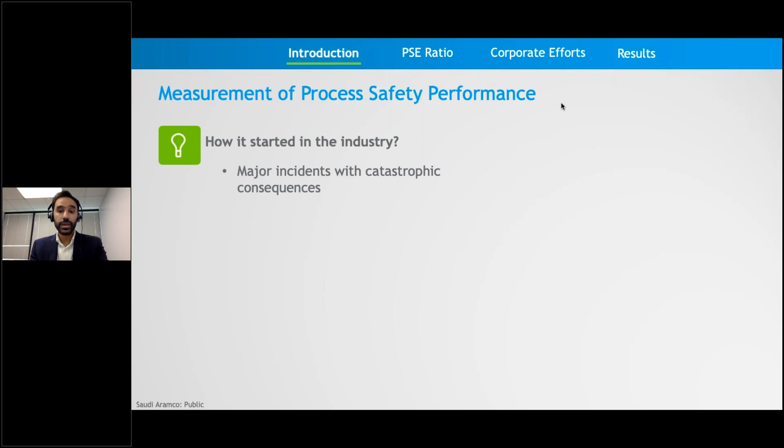In response, the concept of process safety event was established to bridge that gap in the refining and petrochemical industries. It was first introduced in a standardized manner as part of API 754 in 2010, and then as part of IOGP 456 in 2011. A process safety event is defined as an unplanned or uncontrolled release of any material.

In other words, they are events where loss of primary containment occurs, and they could be classified into Tier 1, Tier 2, or Tier 3, depending on their severity. Saudi Aramco has adopted the Tier 1 process safety event rate KPI at the corporate level.

However, we felt there is a need to have higher visibility of lesser consequence process safety events, that is Tier 2 and Tier 3, since the root causes of these smaller events help us prevent Tier 1 and higher consequence events. Hence, we developed a comprehensive KPI that is inclusive of all 3 tiers, and this KPI is called the process safety event ratio.

Our desire to maximize the learning from process safety events drove us to this innovative KPI. The process safety event ratio was introduced as a combined corporate KPI 2 years ago, giving visibility to all 3 tiers of process safety events in a single KPI. The KPI drives improvement by measuring minor events as well as major events.

You can see the formula on your right-hand side. In the numerator, we have the sum of the less severe events, Tier 2 and Tier 3, and in the denominator, we have the more severe events, Tier 1.

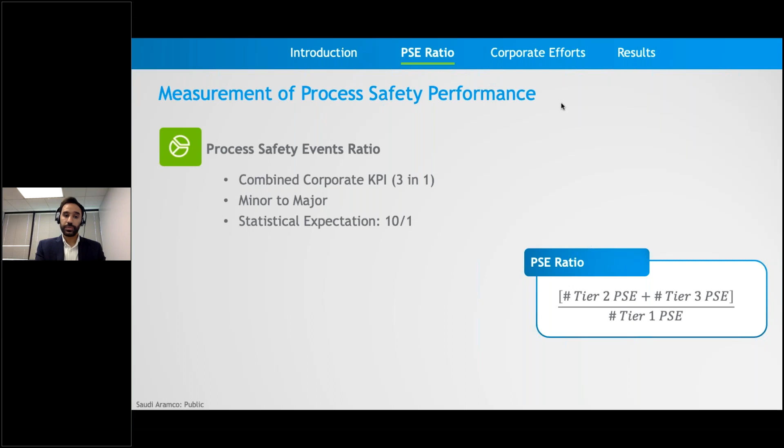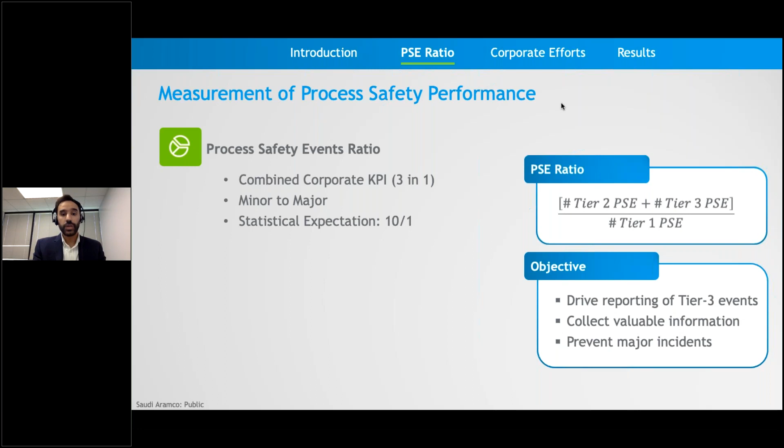The statistical expectation is said to be 10 to 1. However, we made sure that this should not be confused as a target, but the aim is to encourage reporting of minor Tier 3 events and collect meaningful information that could be analyzed to extract learnings in order to prevent major incidents.

This process safety event ratio KPI has been supplemented with corporate efforts to ensure robust management of all tiers of process safety events. Our efforts included developing a process safety event closed loop system, a central system that empowers anyone in the company to report process safety events. It also facilitates classification by independent safety professionals, and all events are investigated and recommendations are tracked to closure through the system.

Conducting regular deep dive analyses to identify relevant trends and benchmark our performance against industry peers. The quality of these analyses has significantly increased with the collected information from Tier 3 events, leading to more accurate trending and results.

Thirdly, establishing a comprehensive process to manage communication of lessons learned across the corporate organizations. That includes a central hub, process safety bulletins, and roadshows that enable exchange of information between process safety SMEs and frontline personnel. And finally, embedding this KPI in a number of regular provisions to support decision-making by management.

These include the weekly safety KPIs report, the monthly field visits by executive management, the quarterly safety dashboard, and the safety committee meetings. All of these efforts were applied not only for the more severe Tier 1 and Tier 2 events, but also to the minor Tier 3 events.

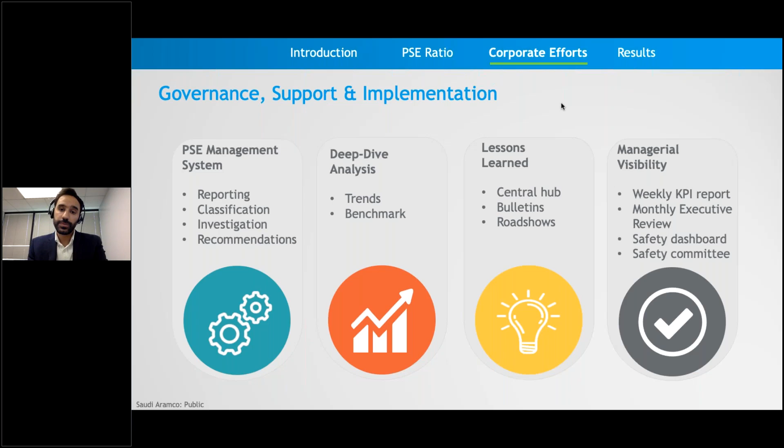At the end, we are glad that all these efforts have yielded significant results, including reporting of minor Tier 3 events has been improved in 2 consecutive years. In 2019, we recorded 48% increase compared with 2018. And in 2020, the increase was 39% compared with the previous year.

In addition, the process safety event ratio KPI has been also an effective tool for site management to gauge the health of the safety and reporting culture. As a result, we recognize the reporting increase of minor Tier 3 events in more than 60% of our organizations in the first and second year as well.

Based on our experience and the positive results we have achieved by adopting this KPI at a corporate level, we are sharing these best practices to benefit the whole process industry. With this, I conclude my presentation. Thank you for listening.

Thank you, Hussein. That was really, really interesting. And thank you for fixing the problem. So it was really enjoyable. I don't know if you have any questions. And in the meantime, while you have time to type some questions,